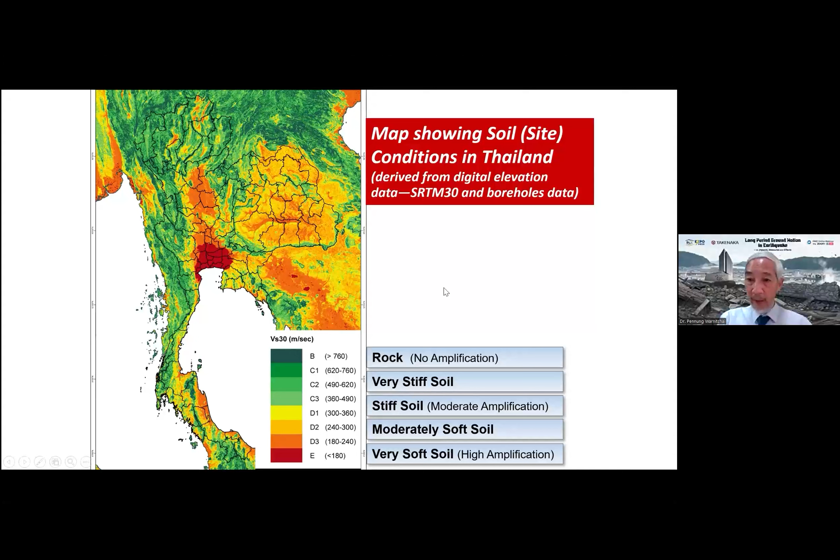Okay, and inside the country, there is one area that has an extremely soft soil condition. That is Bangkok and the surrounding provinces. You can see in this map the red zone. Okay, so it is not just the area with the soft soil. In fact, this red zone is a big soil basin, a very deep soil basin. And the top layer of the soil in this basin is soft soil. But the layers below that are not that soft, but it's a kind of very thick soil basin.

The depth from the surface down to the bedrock is about 800 meters in the Bangkok area. The basin is very large. The boundary of the basin is Chachoengsao, as you can see here, Nakhon Nayok, Ayutthaya, Samut Songkhram. The basin actually covers around 14 provinces in this area.

We know that the soil basin, especially deep soil basin, can amplify the ground motion. And not only does it amplify the ground motion, it amplifies only low frequency ground motion. Sometimes we call this low frequency ground motion long period ground motion, because low frequency means it takes a longer time to complete one cycle of motion, of oscillation. So low frequency means long period.

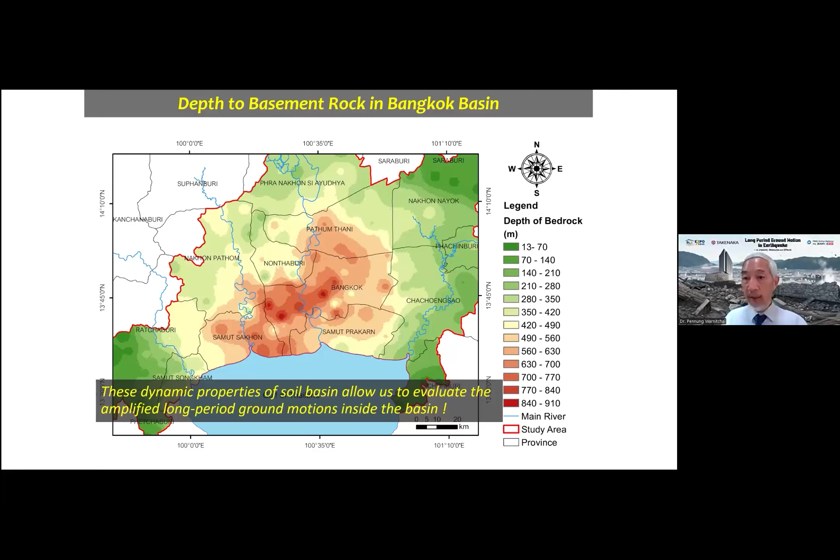Now let me explain how long period ground motion gives an impact to long period structures. Let me show you 3 examples.

The first one is a kind of tall 50-story building. It has its own natural period, or the period that it likes to move in. It's about 5 seconds.

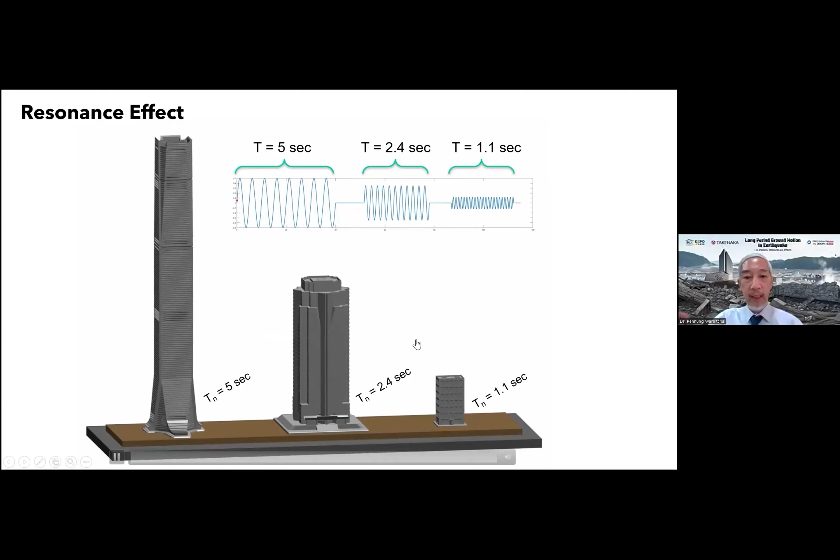Now, we knew about this problem a long time back. This slide was made many years before the earthquake that just recently happened. We came to a conclusion many years before that Bangkok and surrounding provinces are at risk of disaster from distant large earthquakes because we have a deep soil basin that can amplify long period ground motion.

And we have a large number of long period high-rise building structures on top of this basin that will be strongly shaken by the resonant effect with this long period ground motion.

We actually predicted that there are 3 possible dangerous earthquake scenarios that can produce strong impact on tall buildings. The first one is a magnitude 7 to 7.5 in Kanchanaburi, around 200 kilometers from Bangkok. This has never happened yet, but it may happen in the future.

The second possible scenario is an earthquake of magnitude 8 along the Sagaing Fault in Myanmar. The event 3 months ago was close to this one. The last one is an earthquake of magnitude around 8.5 to 9 along the Arakan subduction zone, which is on the west side of Myanmar.

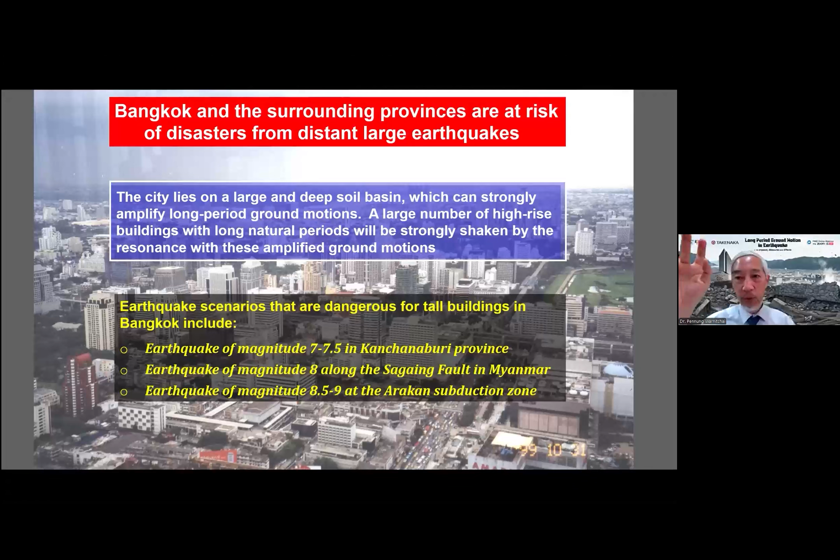This one has not happened yet, but it happened around 260 years ago, so we do not know when it will happen again. But all these 3 possible scenarios, we think the chance to have them during our lifetime is very low, less than 10%. The chance not to have them during our lifetime is more than 90%. But it seems that... I may be wrong, okay, it came too soon. But let's see.

Since we recognized this problem a long time back, we introduced a law, a ministerial regulation, requiring tall buildings in Bangkok to be designed for earthquake resistance. We require all tall buildings in Bangkok, Nonthaburi, Pathum Thani, Samut Prakan, and Samut Sakhon to be designed against the effect of long period ground motion since 2007.

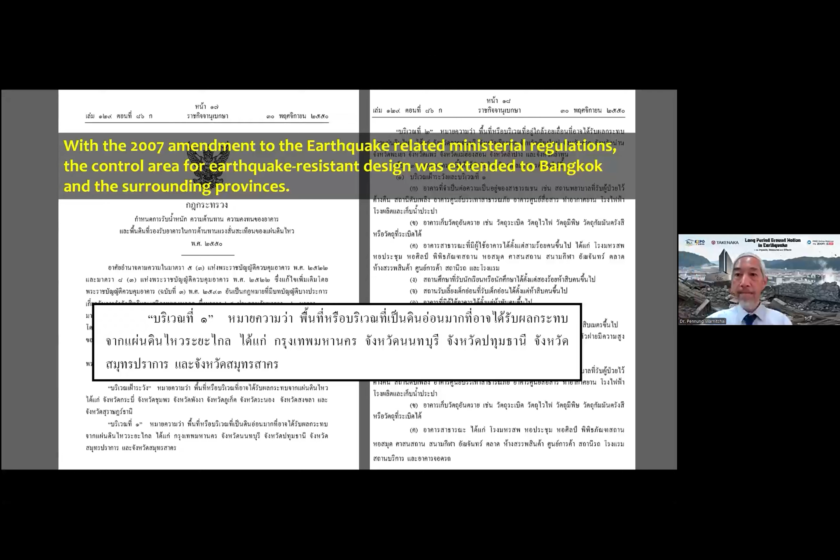Not only having a regulation, but we also have a seismic resistant design standard issued by the Department of Public Works and Town and Country Planning, Ministry of Interior. The first version of this standard came out in 2009, and then we revised it again around 2019.

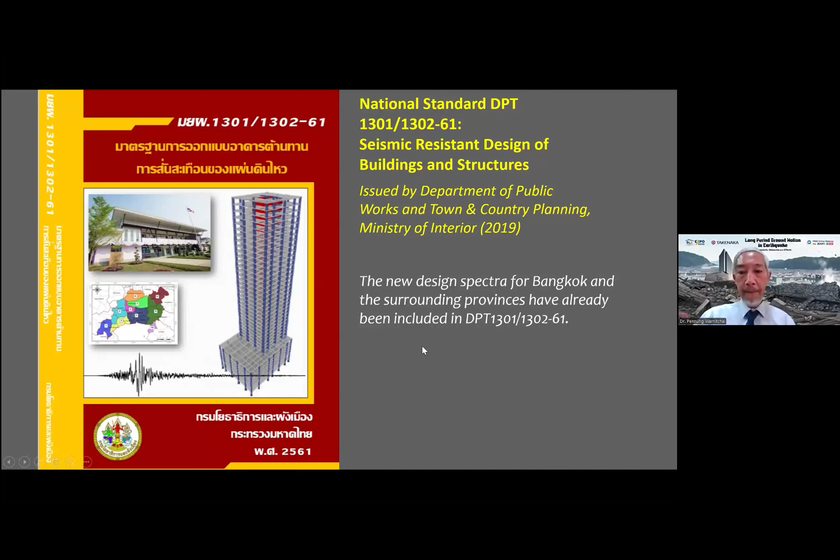In this new standard, we divide the Bangkok basin into 10 different zones, and Bangkok itself is zone 5. For these 10 different zones, we have 10 different curves we call design spectrum.

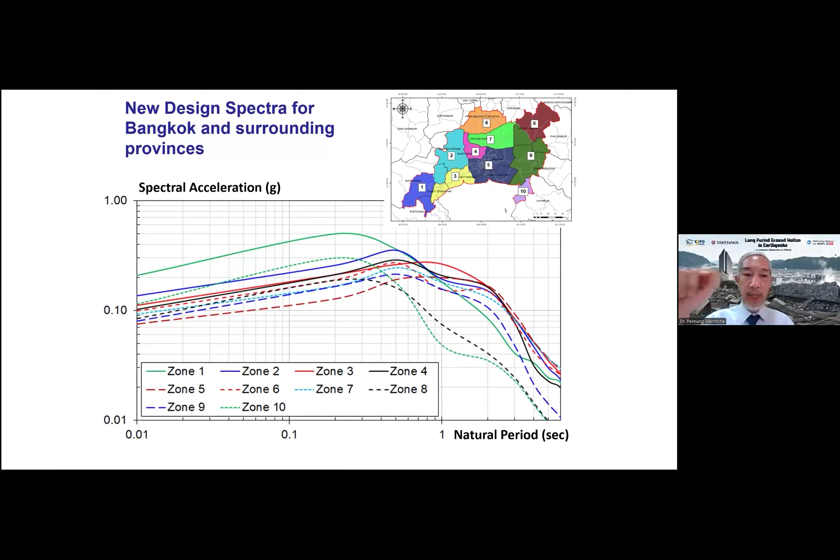This design spectrum's vertical axis shows the level of earthquake-induced force in the building. In technical terms, it's called spectral acceleration, but basically it's an index telling you how strong the earthquake-induced force is in the building. The horizontal axis shows the natural period of the building, which is the vibration period of the structure. So the earthquake-induced force depends on the natural period, and it also depends on the location.

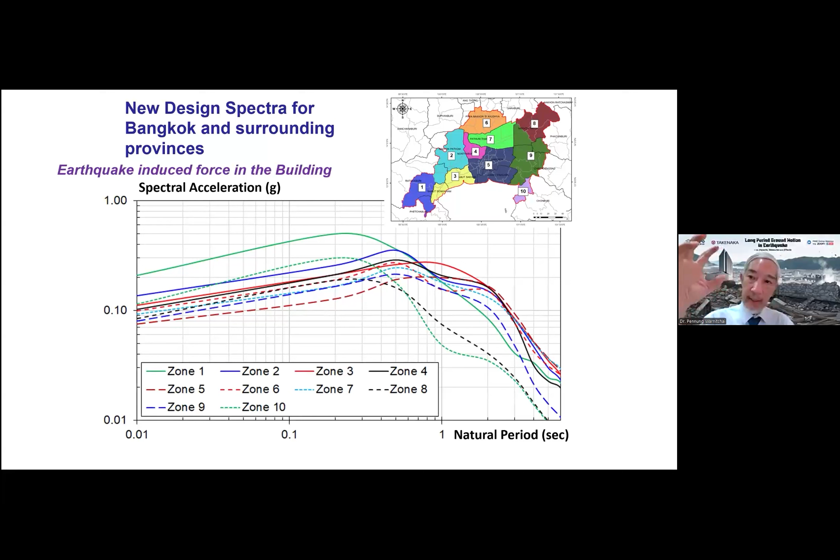We have 10 different graphs that allow engineers to estimate the impact of earthquake in this area, so engineers can design the structure to withstand this impact.

So on the 28th of March, an earthquake happened. This was the strongest that we have ever experienced. I think we never had this experience before - this is the strongest ever experienced since we started constructing tall buildings.

The first thing we did after we got this record was to calculate the impact to the building and compare it with our design spectrum. Let me show you this. This slide shows the design spectrum, the level of earthquake that we consider in building design.

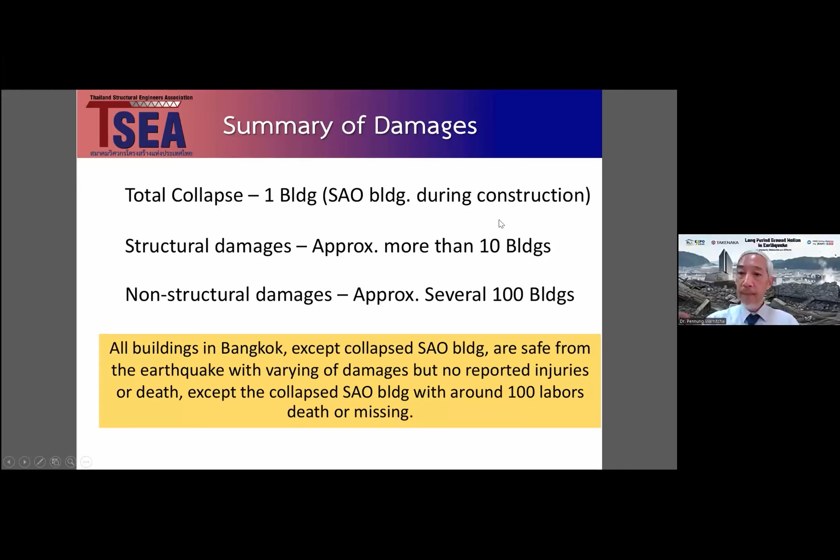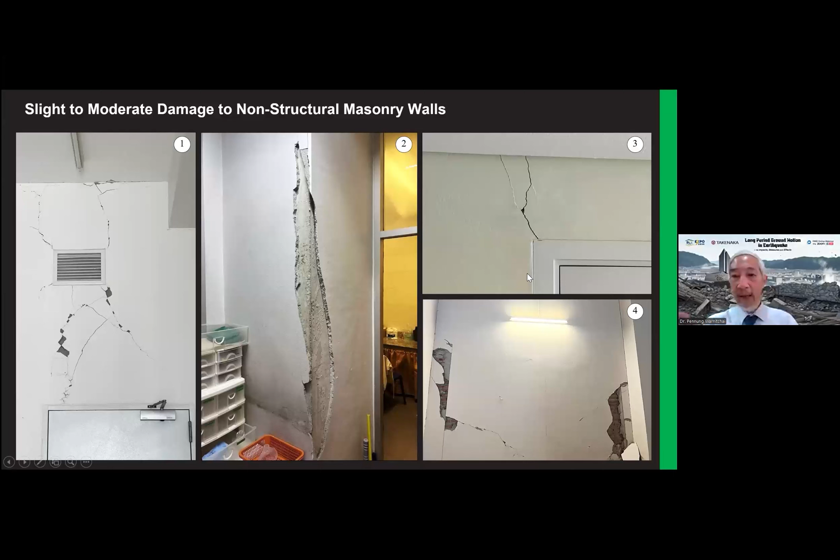This shows examples of damage, slight to moderate damage to non-structural components. You can see the cracking on partition walls, plaster crack. This is a small crack, but it can, and this is a larger one. I mean, more severe damage that you can see through the wall. Okay, maybe to repair this, you need to knock down the wall and replace it with a new one.

These are the damage to non-structural components. Although it does not affect the safety of the building, it actually affects the serviceability of the structure.

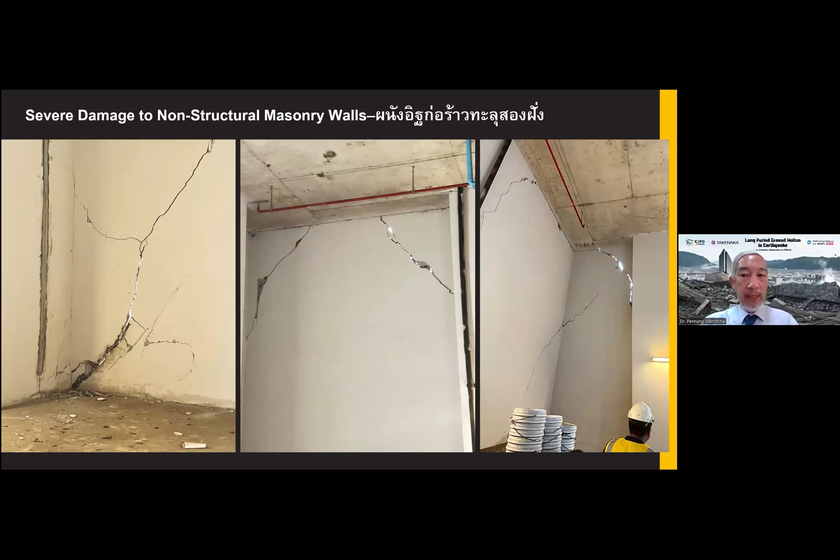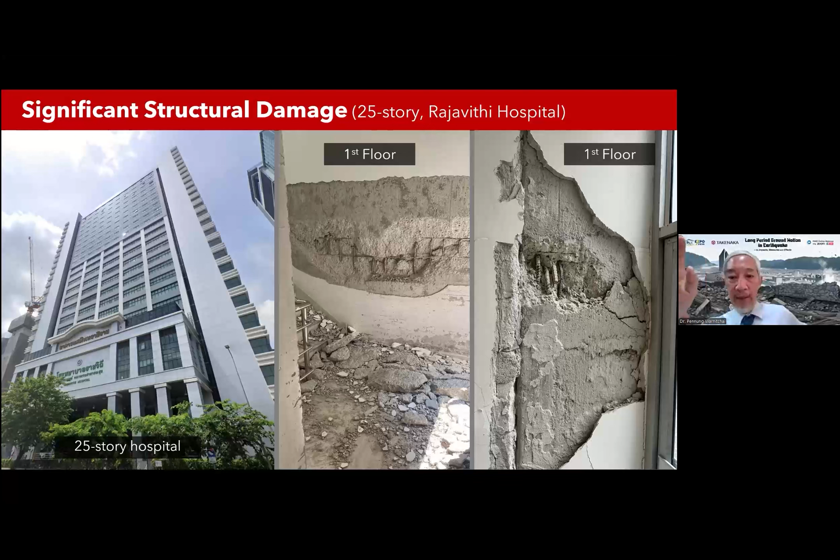So whenever we find damage to the main structure, we stop the use of the building, and we will allow the building to be used again after it has been properly repaired. So this is an example of the damage to Rajavithi Hospital building.

Some of them are serious, some of them are not serious. So in order to understand or get a better picture, we actually use the recorded ground motion that we have in 5 seismic stations in Bangkok to compute one index we call roof drift ratio. Roof drift ratio is defined as the maximum lateral top displacement, we call delta, divided by the height of the building. It's delta divided by h, roof drift ratio. We believe that if the roof drift ratio is high, then the damage in the structure is high. So it's a kind of index to show the impact of earthquake in a simple manner.

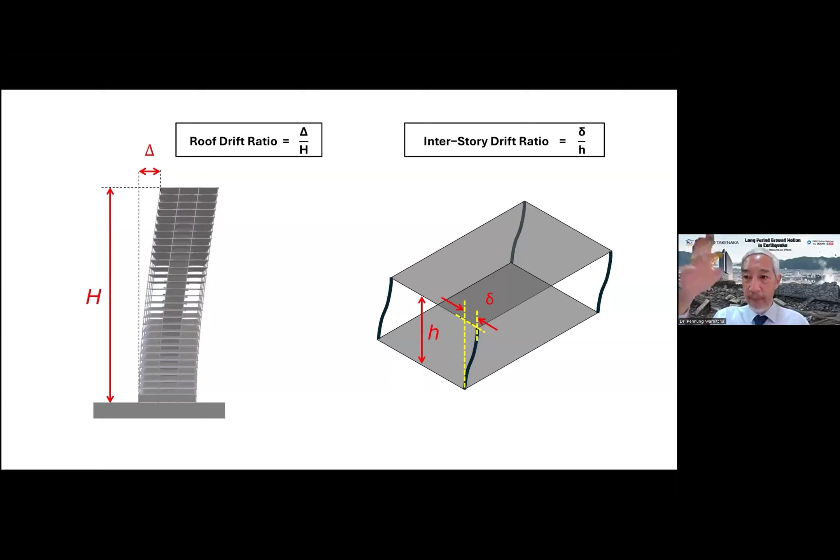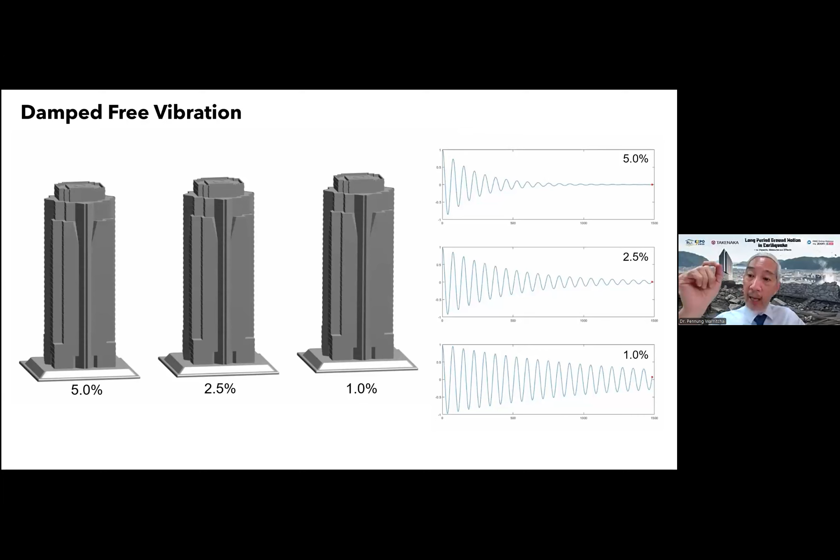In the past, we used to believe our buildings had a rather high damping ratio, about 5%. But based on the study of codes and standards for designing tall buildings in many countries, it's recommended to consider lower damping. So we changed our standard to set the damping to 2.5%. But actually, after this event, we have more data, more evidence, and all the evidence seems to indicate that the damping of our tall buildings is lower than 2.5%. They are actually closer to 1%.

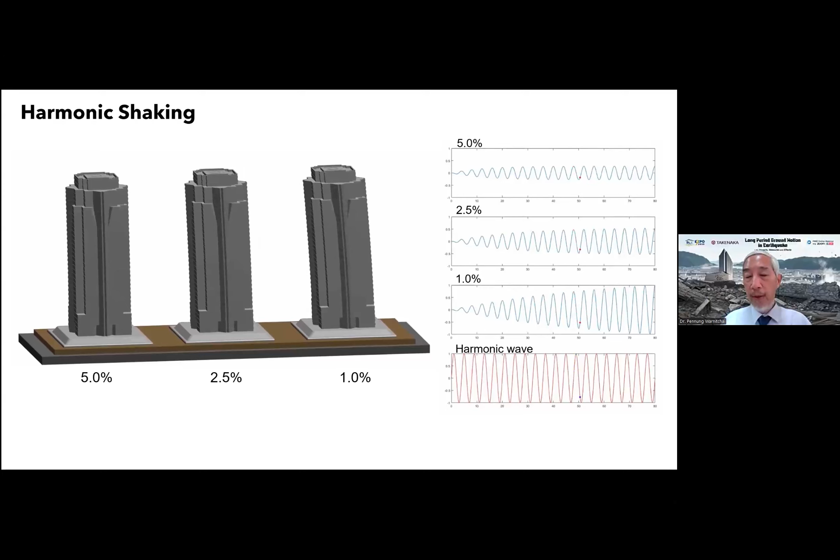So damping ratio is another factor that influences the response of the building. Not only the natural period, but also the damping ratio.

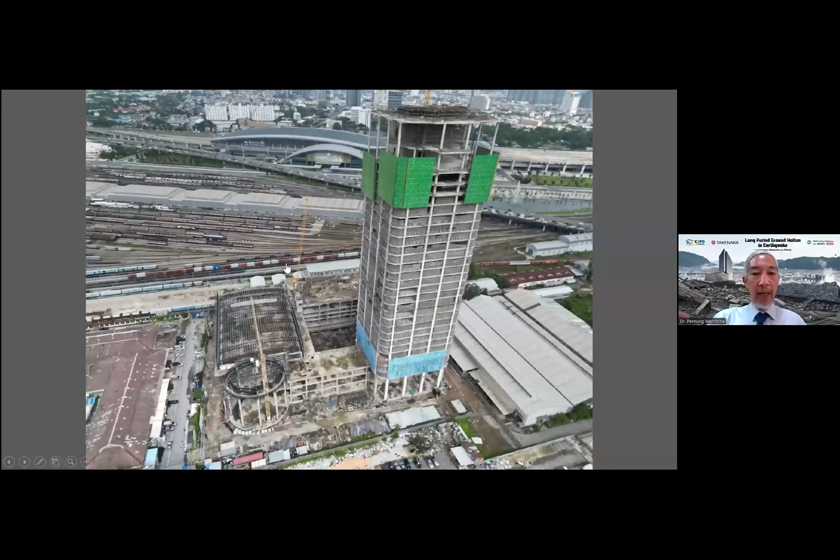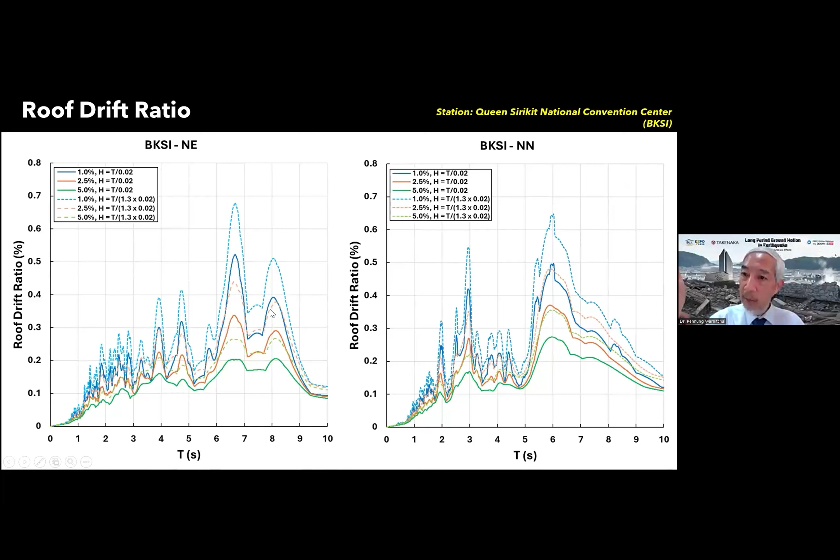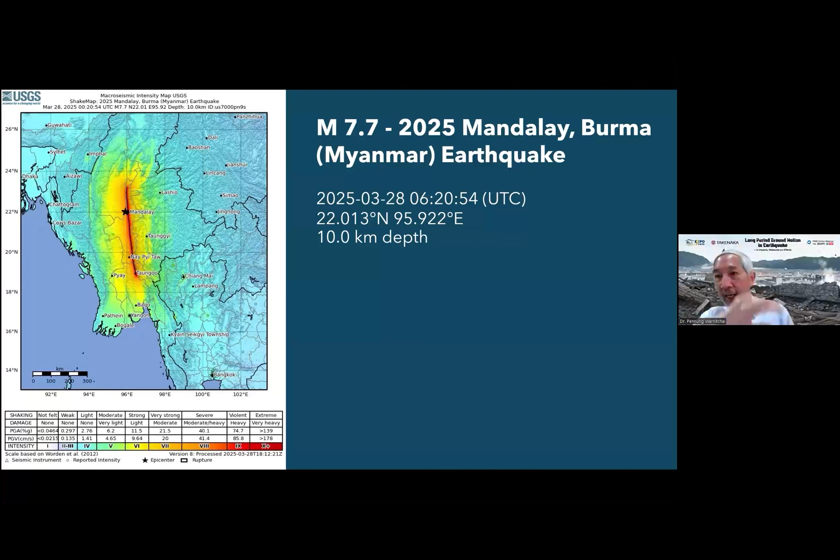Now let me come to the final point. So what will be the future earthquake? You have seen this case, the one from 3 months ago. It was a large earthquake created by a rupture from Mandalay to Naypyidaw. What we are worried about is that it may continue to rupture further to the south in the future. Because after an earthquake rupture, it releases strain energy, and it may need some time to accumulate strain again in this portion, Mandalay to Naypyidaw. But the portion below may have accumulated some strain energy, and now it's waiting—when the level of strain energy reaches some threshold, it may rupture again. So in order to understand this, we have to see the history of earthquake rupture along this fault.

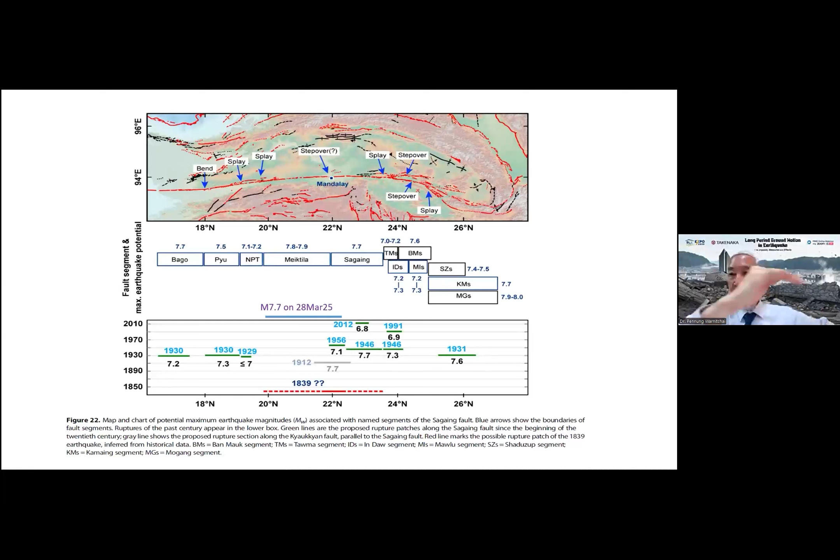Let me show you this picture. This shows the Sagaing fault and its rupture history. The recent one is magnitude 7.7, from Mandalay to Naypyidaw. The other lines show ruptures in the past. You can see the rupture here in Mandalay; the one before March 28 was in 1912, around 113 years ago—a very long time. The portion at Naypyidaw had its past rupture around 180 years ago. But from Naypyidaw down to Bago, down to Yangon, the past rupture was around 95 years ago.

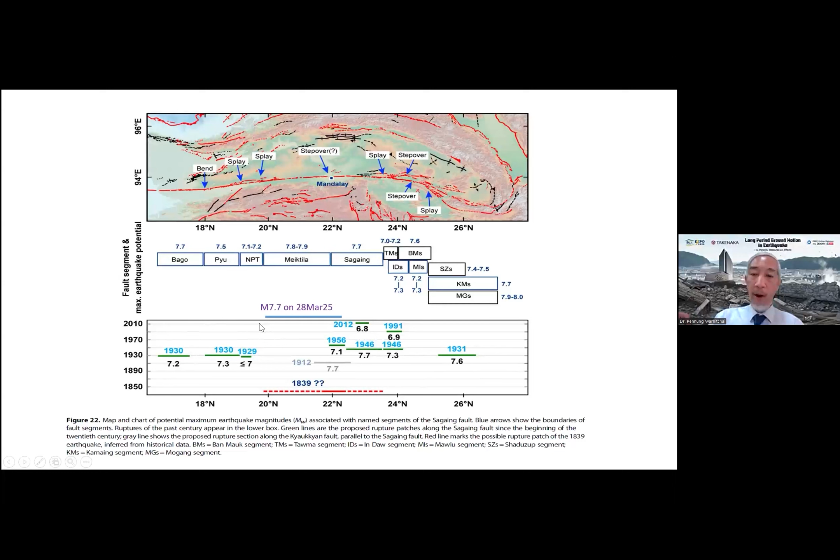So that portion has not ruptured for quite a long time, but not long enough. It may take more time to accumulate more strain, more energy, to rupture again in the future. If it ruptures only a small section, it may not produce a severe earthquake—maybe 7.1, 7.2, 7.3—and the impact to Bangkok may not be so strong. But if it produces 7.7 again or larger, it may produce an even stronger earthquake impact on Bangkok, because it's the same size or larger, at a closer distance to Bangkok. So this shows you the possibility of a future earthquake, but I cannot tell you when it will happen again.

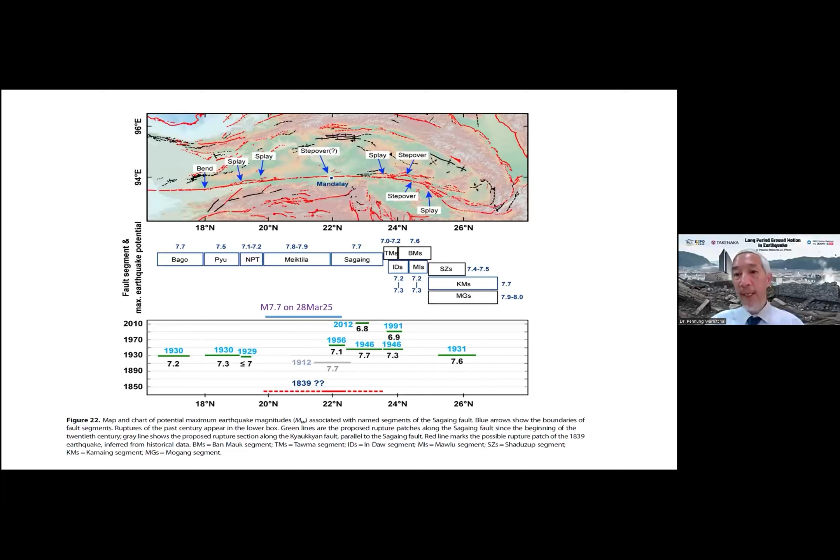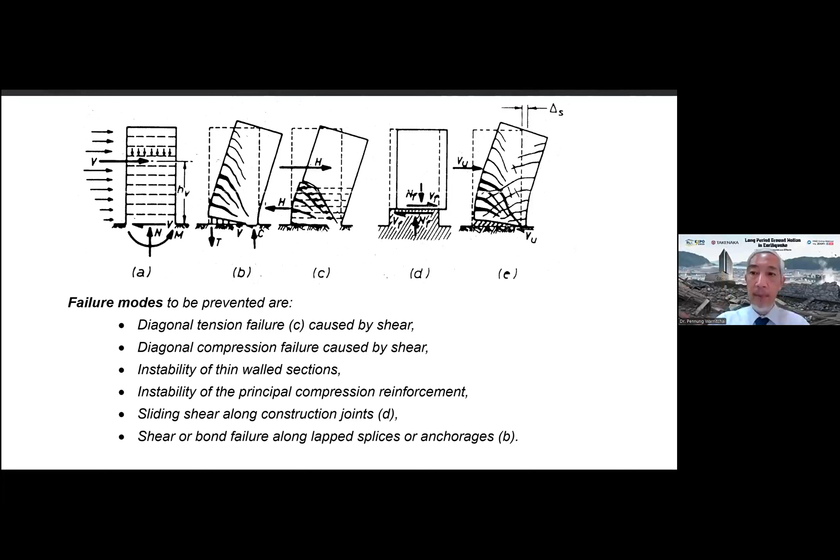The approach is we need to suppress or prevent brittle failure modes in the shear wall. In this event, we have seen some buildings have a lap splice failure. Some buildings have rebar instability. Some buildings may fail by shear. All these are brittle failure modes that need to be prevented in the core wall. If we prevent all these failure mechanisms, then the wall will be more ductile.

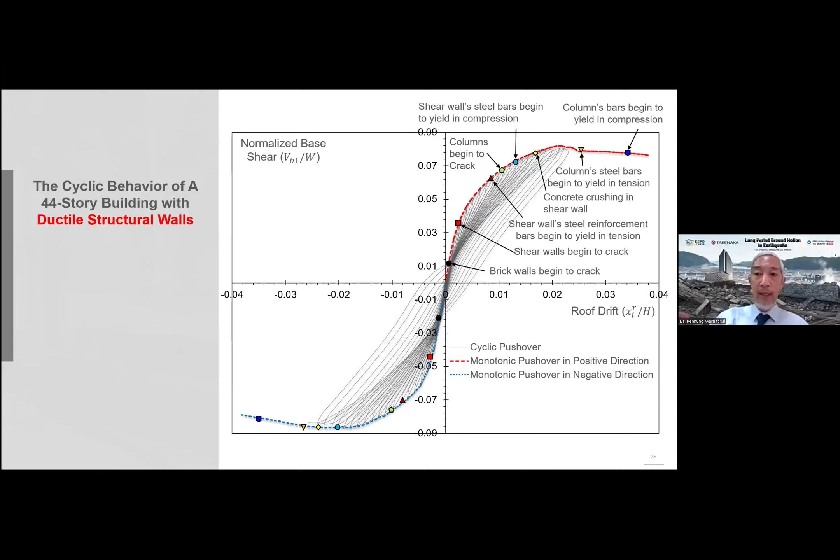Our structure will be safe, but we may not be able to prevent damage to non-structural components, because, as I showed you earlier, the yellow zone and the orange zone represent the level at which, if the structure deforms up to that level, it will have damage to non-structural components. So how can we prevent damage to non-structural components?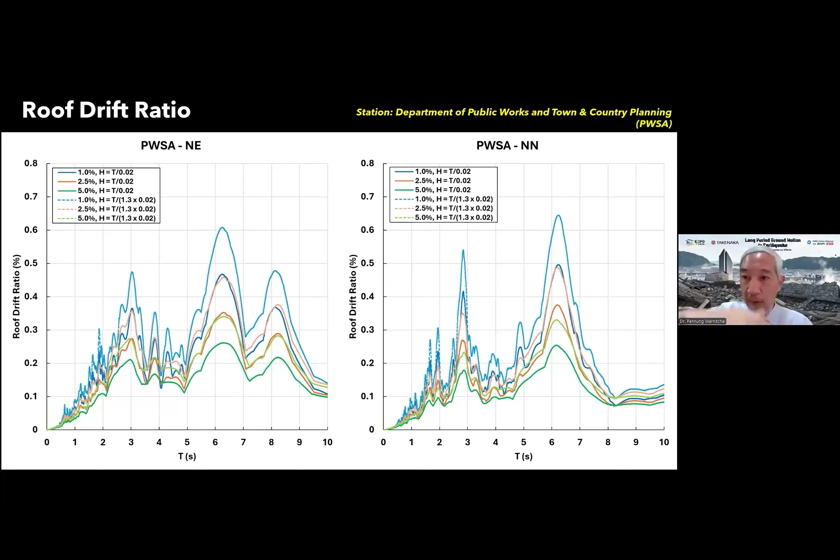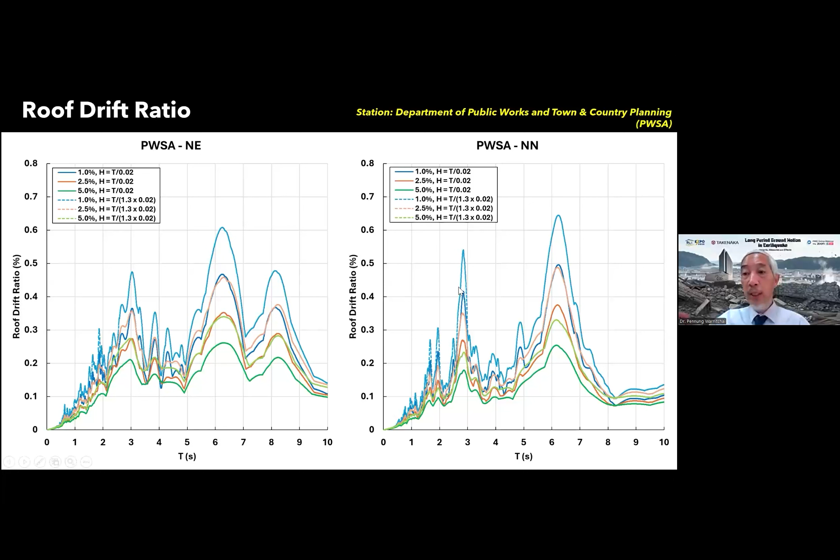If you want to do that, as shown in this picture, you need extra damping. Most buildings are likely to have damping as low as 1%, or somewhere between 1 to 2.5%. But if you increase the level of damping, you can bring the roof drift ratio down. If you want to increase the level of damping, you want to be sure the structure has a high damping level. One way to do that is to install a vibration damper into the building.

This is an example of how we can increase the level of damping. One way is to put in a viscous damper, but actually there are many ways—there are oil dampers, there are metallic dampers. We can install this kind of device into tall buildings, and it will increase the building's ability to absorb vibration energy, increasing the level of damping in the building.

This approach has not been implemented yet in Bangkok, but I think after this event, we may have to seriously consider this option for the future. It can also be used to improve the performance of existing buildings. If you are not sure about an existing building's performance, or want to reduce its risk for future earthquakes, you can think about putting this kind of damper into the system.

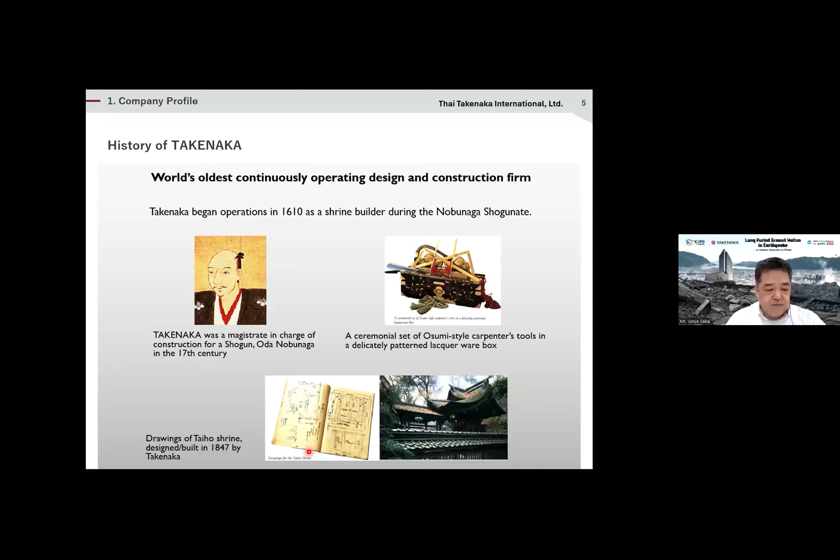So I'd like to begin with the company profile of Takenaka. In 1610, the founder of Takenaka established a business in Nagoya to conduct temple and shrine construction. This is the first style of design and build. Here, you can see the design sketch, and they built based on the design. This was the 17th century, and this design-build single responsibility style has lasted until now in the 21st century.

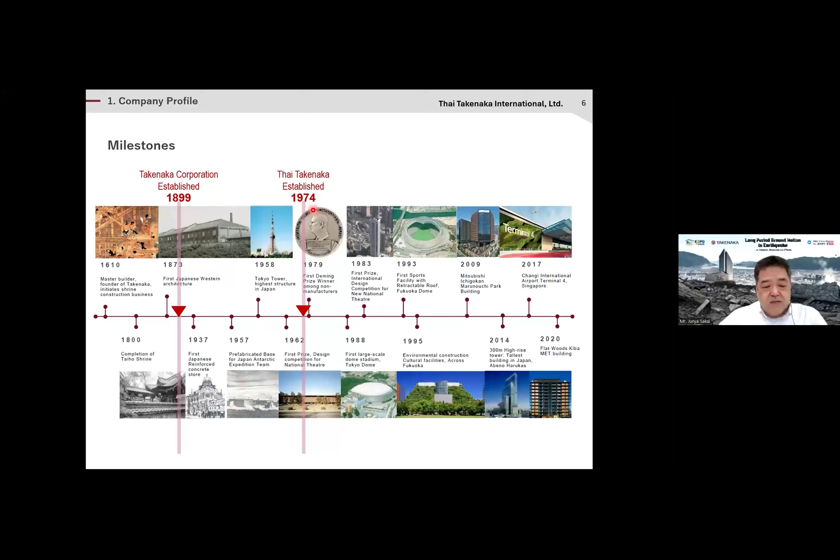In 1899, the corporation was founded in Kobe, and Takenaka took on many challenges for cutting-edge technologies. And in 1974, Thai Takenaka was established, and last year we celebrated our 50th anniversary. Takenaka is one of the big 5 contractors in Japan. It reported approximately 1.6 trillion yen, meaning 11 billion US dollars in revenues in the 2024 fiscal year, and 30.5 thousand employees in our group. The global business portion is around 1/8 of total sales and employees.

A somewhat unique aspect of Takenaka is that it is the only privately held general contractor among Japan's Big 5, and we focus on architecture, with less than 10% civil works, and are a design-build specialist for over 70% of projects. And we have trusted partners, so the majority of projects are single source awards.

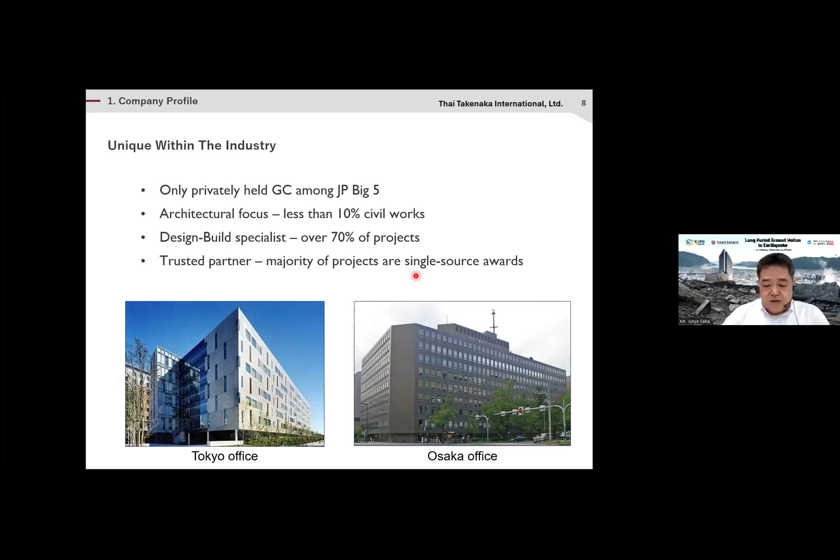Takenaka has 30 offices overseas in Asia, Europe, and the United States. In Asia, we have 12 offices, including Singapore, China, Indonesia, Malaysia, Thailand, Vietnam, India, and Myanmar.

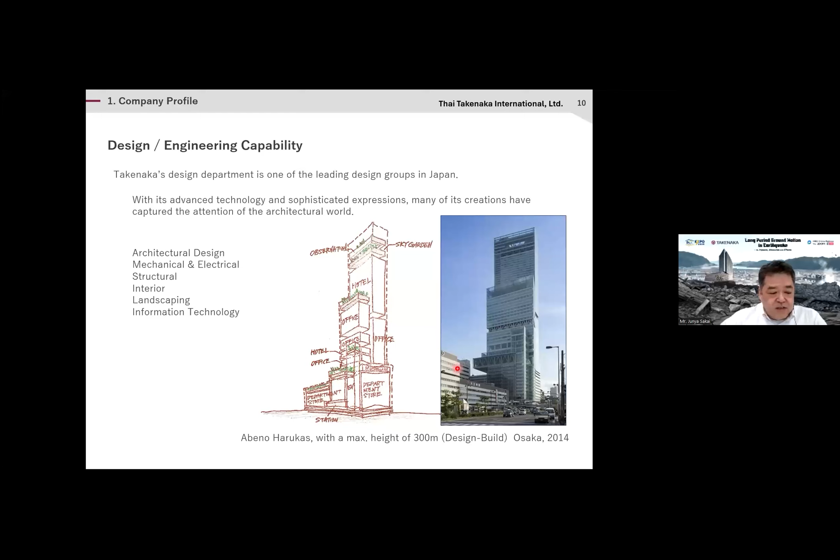As I said, Takenaka is a design-build company, and when we look into design works, the Takenaka Design Department is recognized as a leading design group in Japan. The example shown here is the tallest building in Osaka. With a height similar to Mahanakhon Tower, it has an attractive facade as a multi-functional complex building. And to realize the design and its requirements, Takenaka's construction capability is enough to achieve the quality, with sufficient experience.

This is an example, the Sapporo Dome. This field of natural lawn goes into the dome at the time of rain and snow. And on the right side, there is a high-rise condominium building connected with 3 layers of sky garden. It required a high level of construction accuracy at each connecting level.

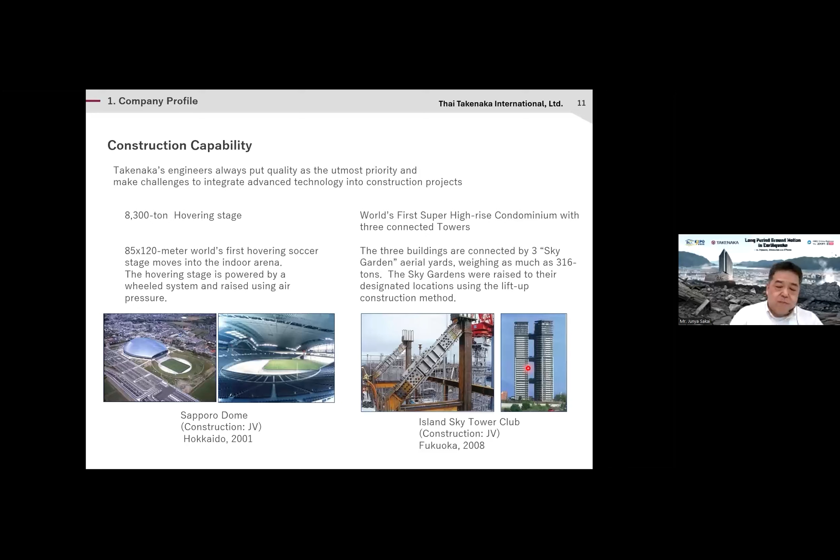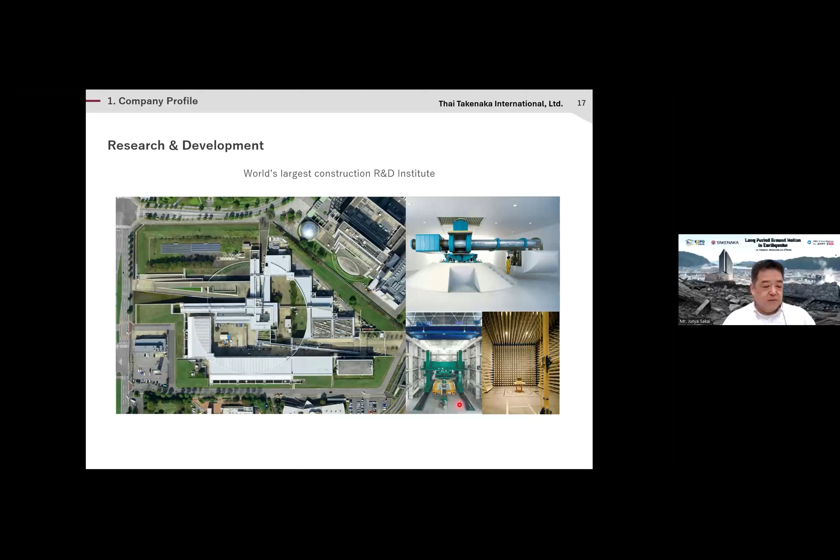Takenaka also has a research and development institute in Japan, which is one of the largest construction R&D institutes. We have a geocentrifuge, wind tunnels, a loading testing machine, fire furnaces, and so on. That is the project experience shown in the photos I passed through.

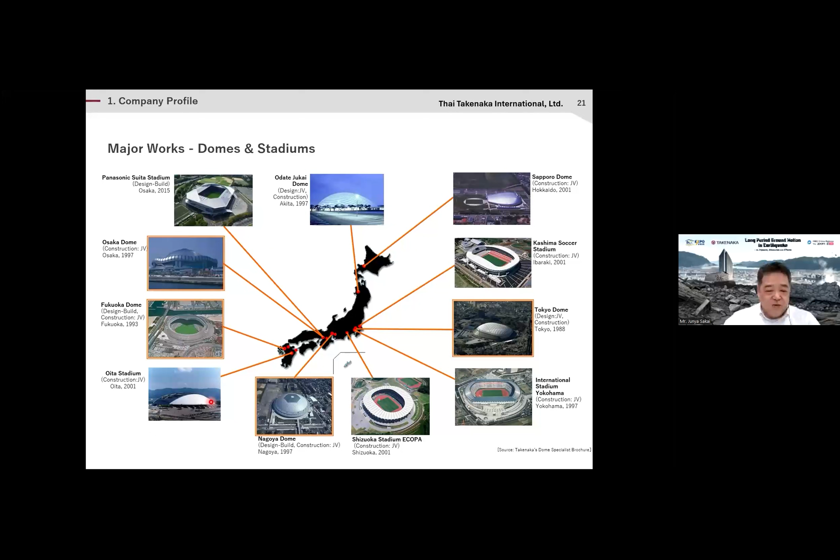To talk about Takenaka International, we are also the same design and build company, providing the same service as Takenaka in Japan, as one-stop solutions. There was 6.2 billion Thai baht of sales in 2023. Now more than 70% of our clients are non-Japanese companies. This is the end of the company introduction.

Let's move on to the long period ground motion matters. Firstly, as it freshly remains in mind, I'd like to talk about the earthquake in Myanmar. It was already explained by Dr. Pennung, but it happened at 13:20 Thailand time on the 28th of March, Friday. The epicenter is near Mandalay, Myanmar, at a depth of 10 kilometers from the ground. The magnitude of the earthquake is 7.7.

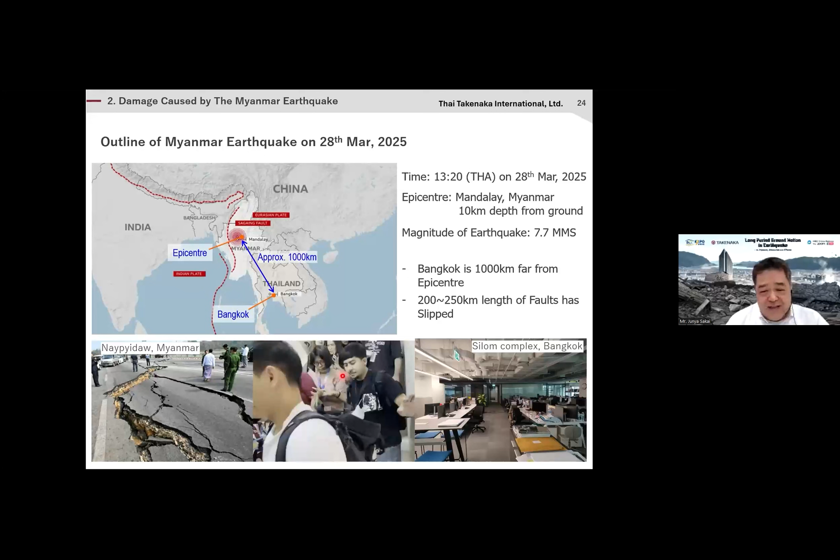This is showing what happened after the earthquake. We are evacuating to the ground floor. And this is showing that at the earthquake, people were not that panicked, comparatively calm behavior. Okay.

Why, in Bangkok, far from the epicenter, did high-rise buildings shake? It is related to long period ground motions. Long period ground motion mainly consists of surface waves that propagate near the surface with low attenuation. This is different from the characteristics of body waves, like P waves and S waves, which have distance attenuation. Long period ground motion is also amplified under the condition of a thick sedimentary layer above bedrock with shear velocity of more than 3 km per second.

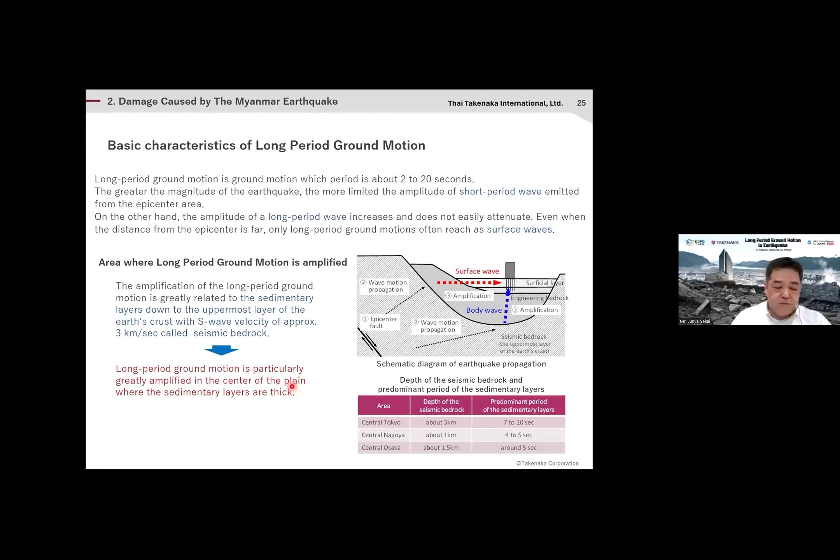So back to the Myanmar earthquake. The epicenter is shallow, and Bangkok has a thick subsoil layer above the bedrock. That makes long period ground motion propagate with low attenuation and be amplified by soft layers. That resulted in some high-rise buildings showing big floor drifts at the top, and as already shown in Dr. Pennung's slides, the big floor drift differences between two buildings damaged the joints of the connecting corridors. And water in rooftop pools caused sloshing and spilled off the buildings.

Let me skip and move on to the next topic. Let us look into the case in Japan and the actual measures in Tokyo. This is going to show videos of tsunamis. That is just information for those who don't know.

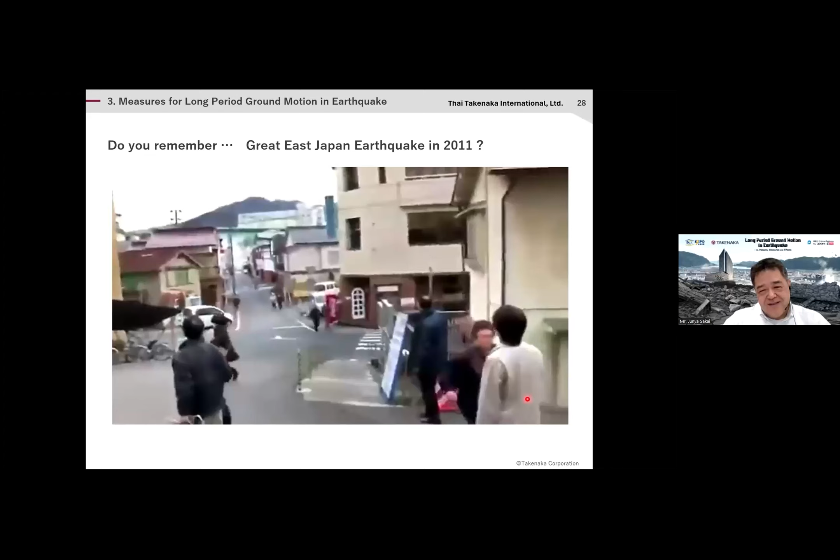Mr. Junya, you need to move the pointer away from the screen. Oh, I see. Let's try again. Or could you try pressing enter on the keyboard? Yes, there it is.

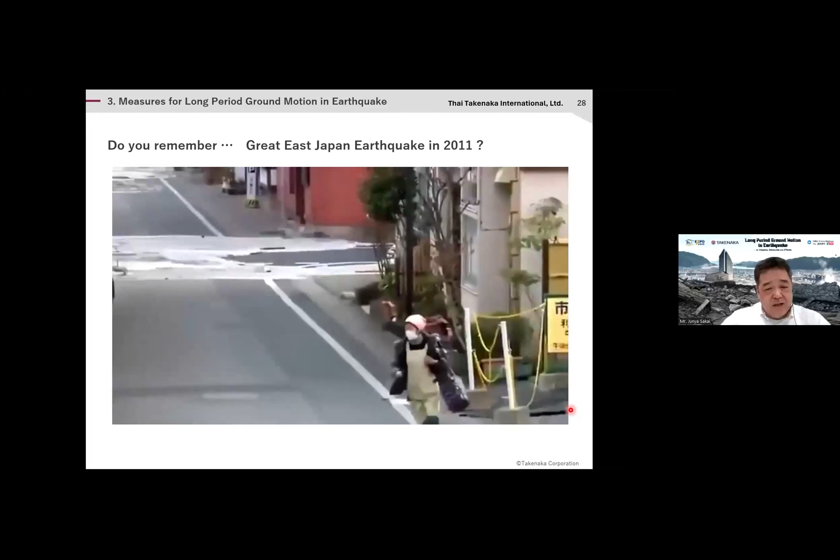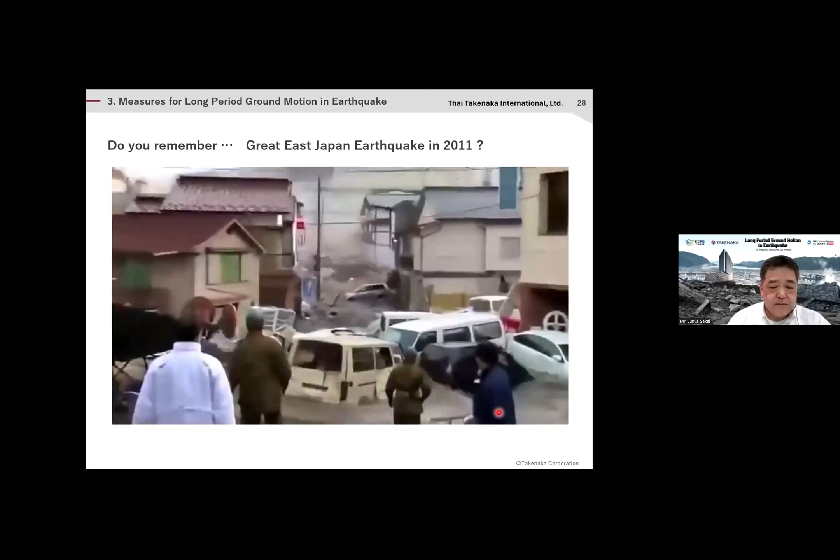This is rather not related to long period ground motion, but it shows the significance of the earthquake's tsunami effect. Okay. So this photo represents Rikuzentakata, a beautiful town facing the Pacific Ocean, famous for its green trees and white beaches, but it was swallowed up by the tsunami like this.

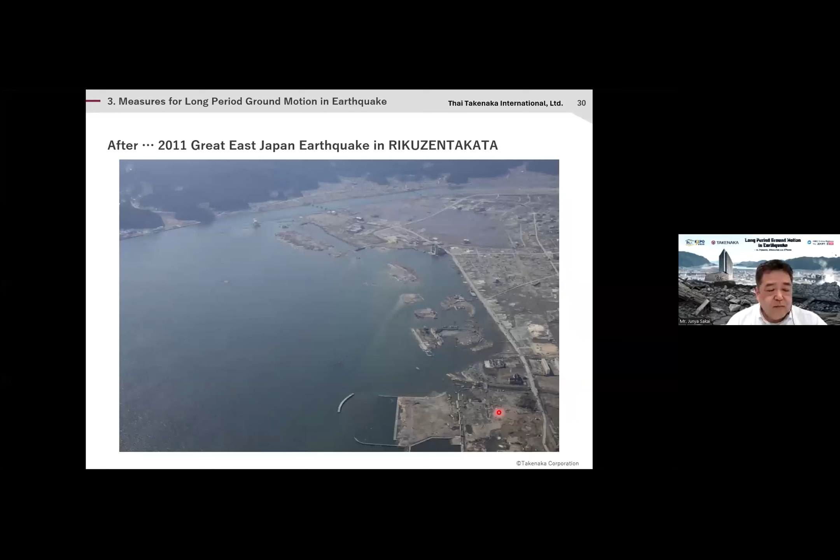At the same time, in Tokyo, 300 kilometers from the epicenter, this earthquake raised an issue on the seismic performance of skyscrapers, like in Shinjuku, now shown in the slides. This is also a movie. Enter. This movie is playing rather fast forward, but it shows the shaking of the skyscrapers at that time. This is the same phenomenon we've seen in Bangkok.

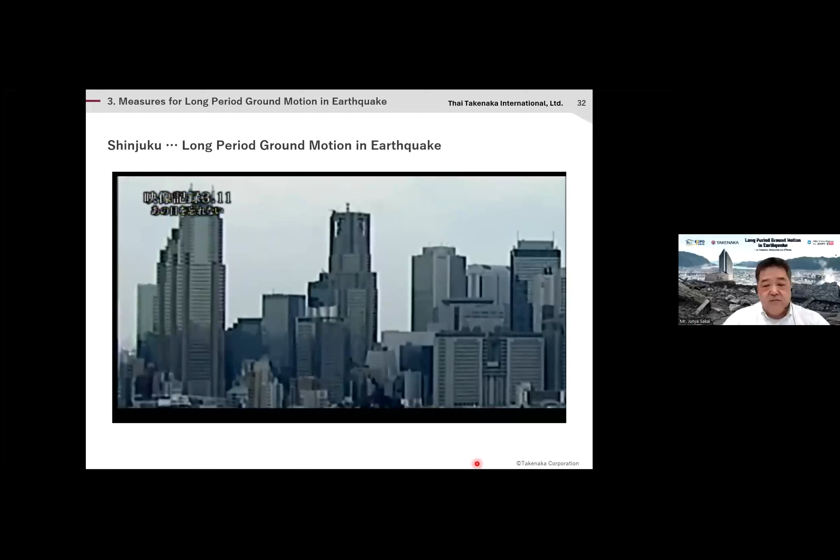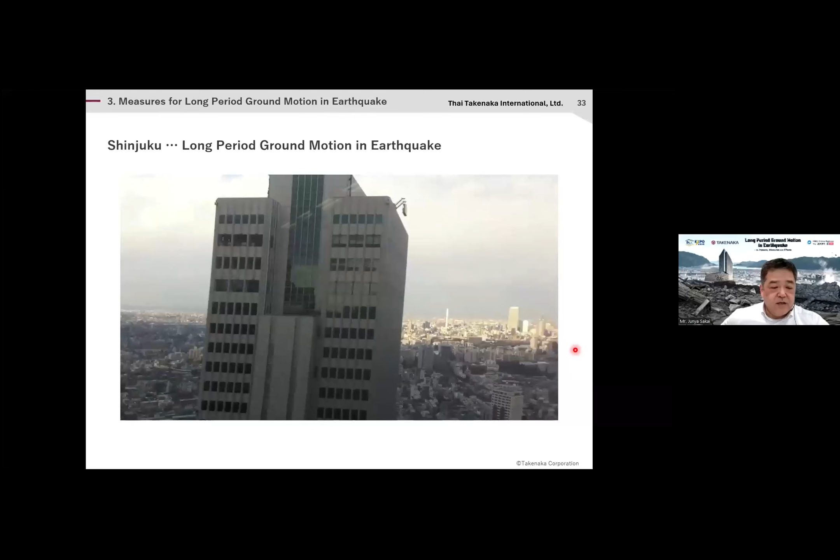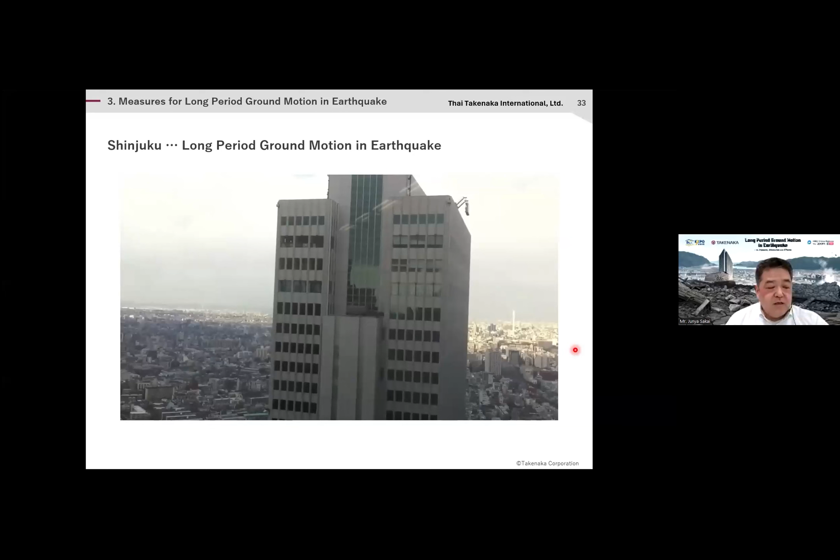This is also the video. This picture shows a slow shaking of some buildings in the Shinjuku area. We can see the slow movement that corresponded to the first mode of the buildings. The building on the left side is named Shinjuku Nomura Building, built in 1978. After this event, Takenaka retrofitted the building by installing a TMD, tuned mass damper, on its roof. I'll talk later about this in detail.

Even far from the epicenter, many skyscrapers continued shaking in the Great East Japan Earthquake 2011. This is the same as we've seen in Bangkok, and it is due to long period ground motions. Since then, strengthening of existing skyscrapers has become the key issue in Japan. A thorough review of analysis and observational records revealed that the damping rate of skyscrapers is only 1 to 2% without vibration control systems.

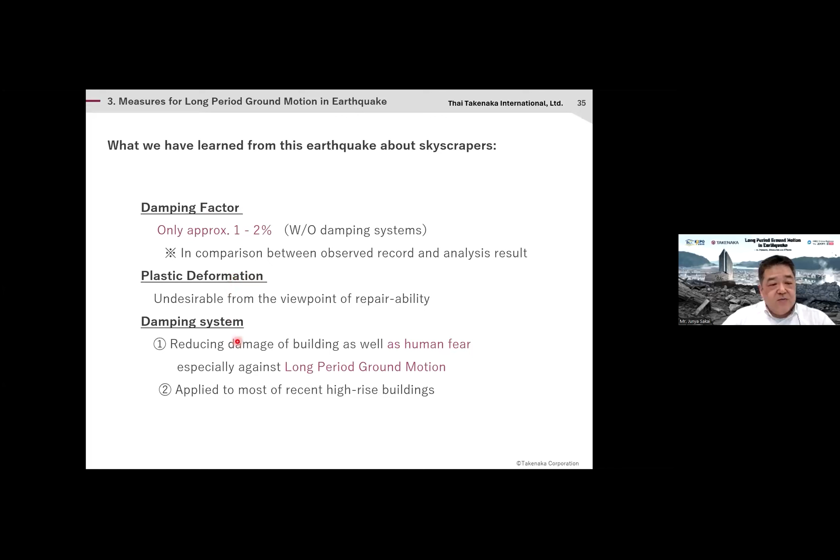A design concept of absorption using the plastic deformation of structural members is not desirable from the viewpoint of repairability, since it is difficult to repair. So damping systems are necessary, as also in the presentation of Dr. Pennung. These systems are necessary for reducing the damage of the building as well as human fear, especially for long period ground motions. From the viewpoint of resilience, damping systems are applied to most of the recent skyscrapers in Japan.

The main countermeasures against long period ground motion are to add dampers or to install a TMD on the rooftop. Damper installation has three disadvantages: dampers need to be installed on each floor, construction work is carried out in rental space that is already used, and the external appearance may be affected. On the other hand, TMD, tuned mass damper, installation can solve these three disadvantages. So we compared several types of TMD as countermeasures against long period ground motions.

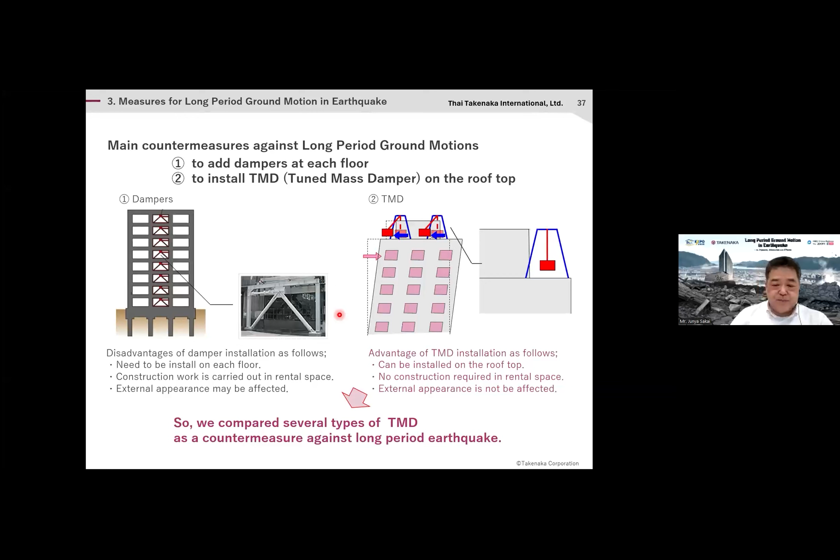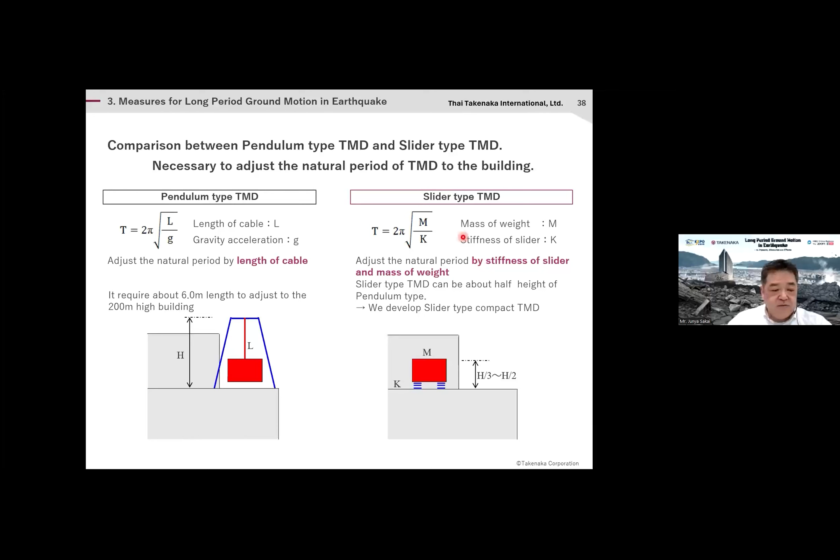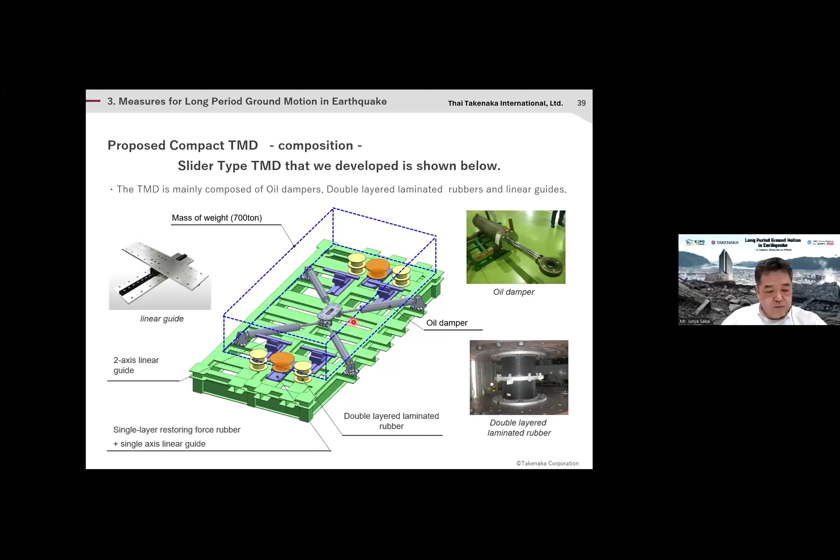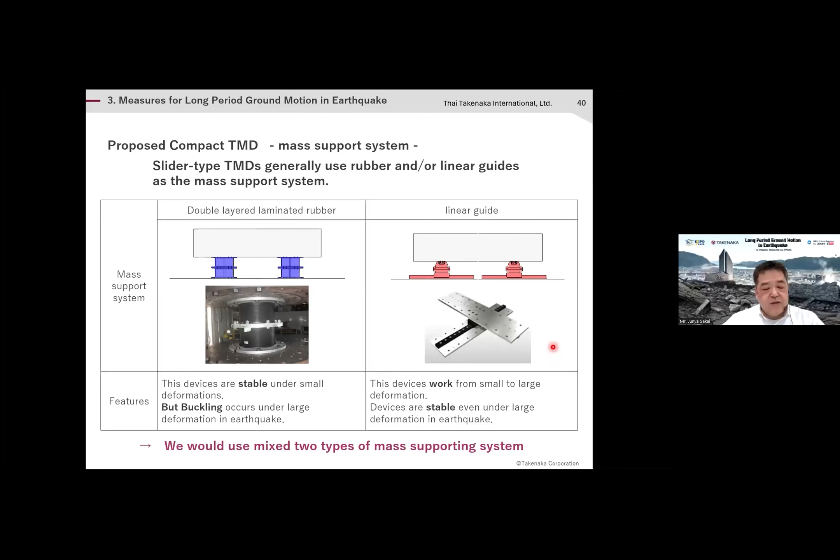Slider type TMDs generally use rubber bearings and/or linear guides as the mass support systems. The left side shows double-layered laminated rubber bearings. These devices are suitable under small deformations, like in wind load. But in large deformation, like under a big earthquake, they become like this, and buckling may occur. The right side picture shows a linear guide. These devices work from small to large deformations and are stable even under large earthquake deformation. We decided to use a mix of these two devices for the mass supporting system of the compact TMD.

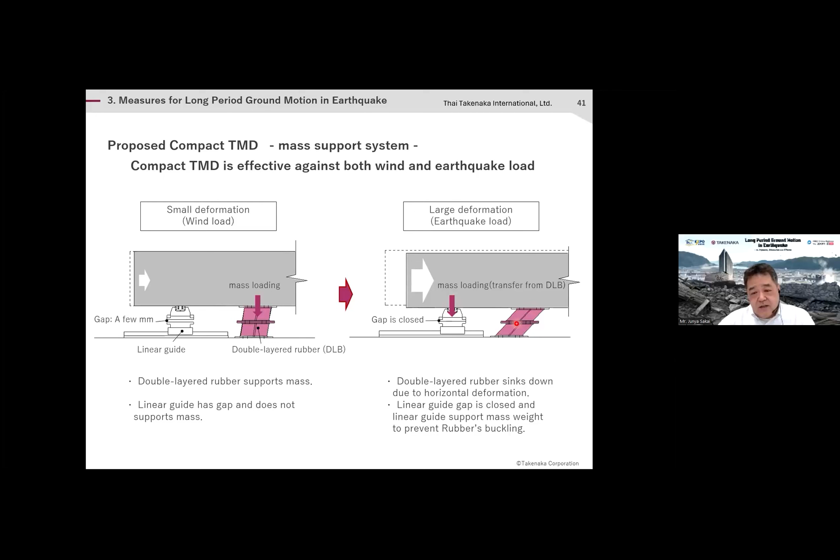The compact TMD is effective against both wind and earthquake load. In case of wind load, horizontal deformation will be small, so it moves like this, and the linear guide side has a few mm gap, so they will not touch each other. In case of earthquake load, horizontal deformation will be large like this, so the double rubber bearings sink a little from here, the gap is closed and the linear slider comes into operation. So under wind load the mass is supported only by the double-layered rubber bearings, but under earthquake load the linear slider also supports the mass. So the loading is shared by two devices.

The compact TMD was applied in the Shinjuku Nomura building, which was built in 1978 with a height of 203.25 meters. The proposed compact TMD was installed in the machine room on the roof, which has a limited height of 2.8 meters. It's a free space for the machine room. The client was also having trouble with the elevator's acceleration sensor reacting to strong wind, and every time it stopped and could not be operated.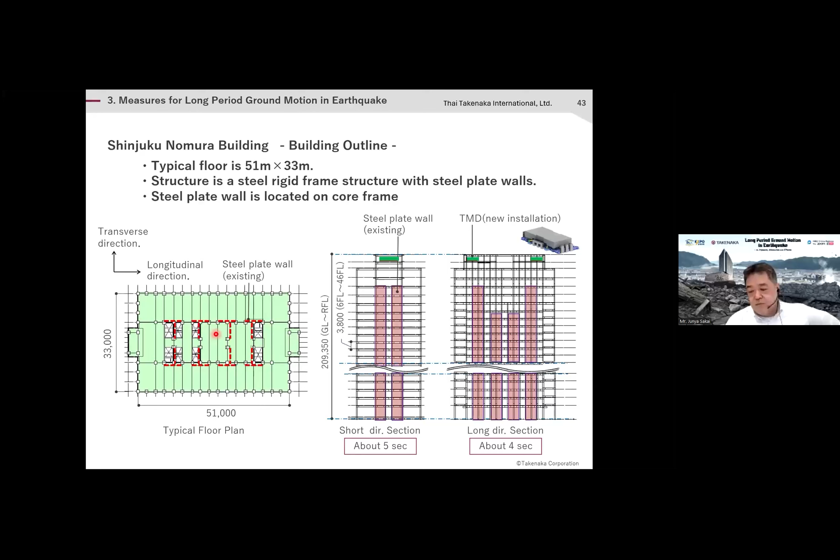Prior to actual retrofit work, performance confirmation tests were carried out on full-size models. We carried out two kinds of tests: a static test and a dynamic free vibration test. The weight of the TMD mass is 700 tons, and the size is 5.62 by 11.8 by height of 1.51 meters.

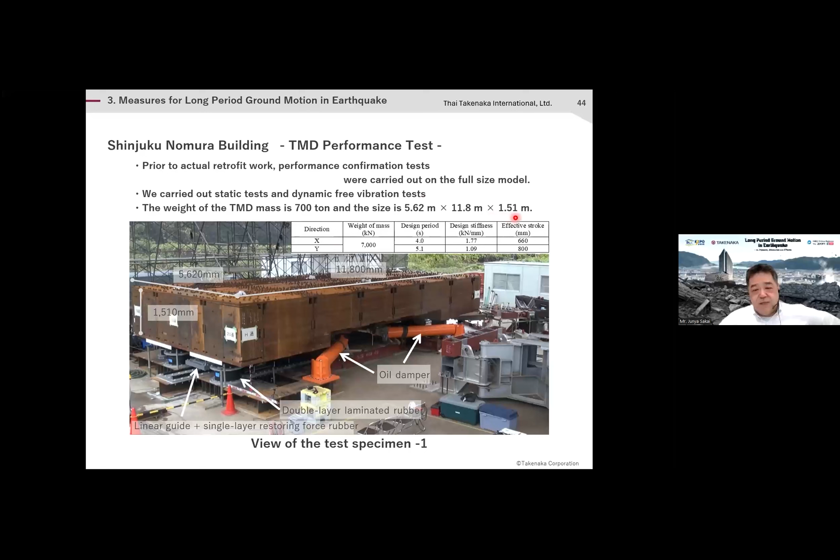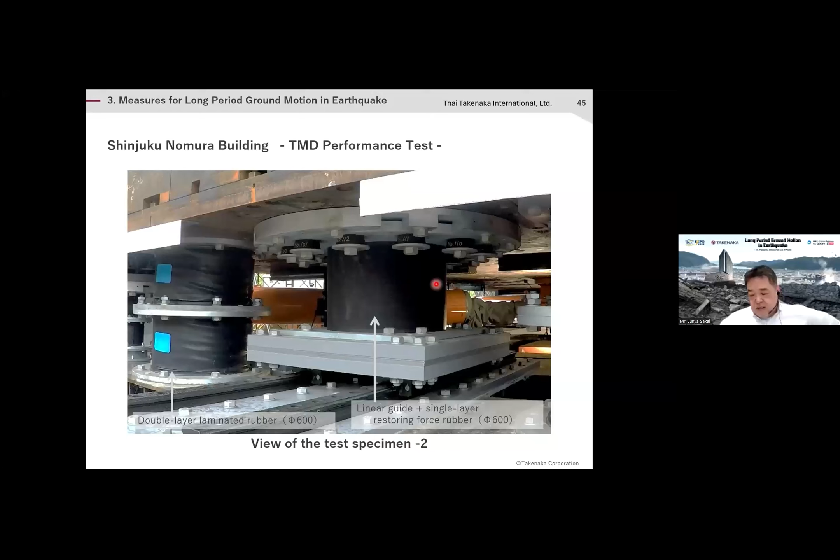As shown in the left side picture, double layer laminated rubber bearings. The right side is a picture of a single axis linear rail with a single layer rubber bearing above. Diameter of both rubber bearings is 600 mm.

This picture shows a linear guide slider and oil damper. There is a yellow oil damper that can be seen here.

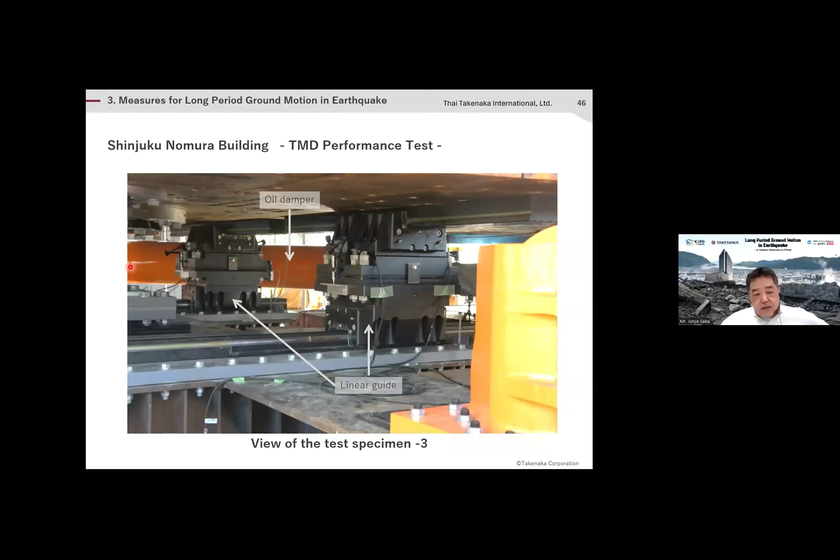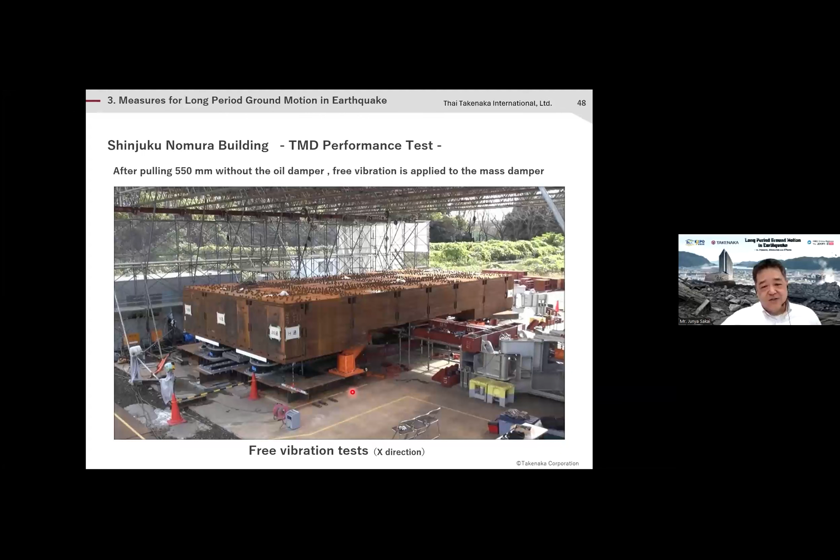This figure shows the free vibration waveform of the horizontal displacement over time, observed during the test in the x direction. At first it starts at 550, then is released showing this wave shape, and then it gets smaller.

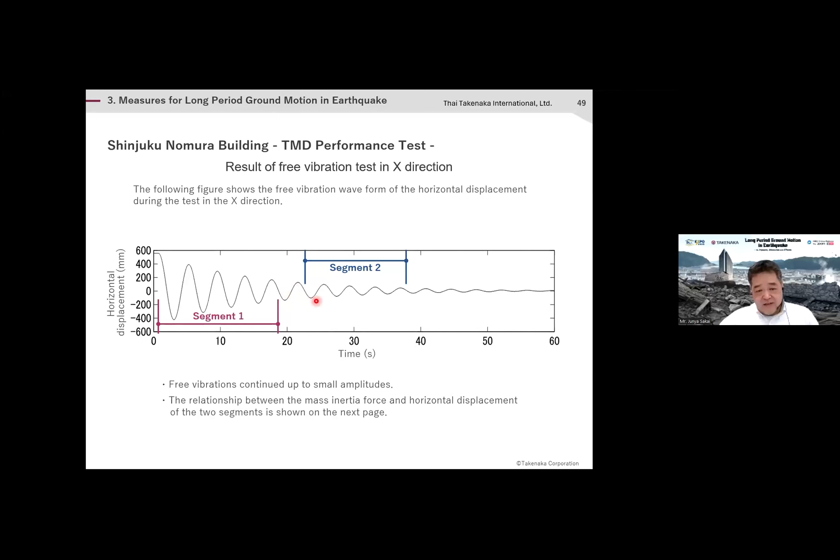This figure shows a relationship between the mass inertia force and horizontal displacement for two segments, a big segment and a small segment. The hysteresis of segment 1 shows a stable behavior even for amplitude that exceeds the allowable displacement of the double layer laminated rubber. The hysteresis in segment 2, with rather smaller amplitude, shows linear behavior up to small amplitude.

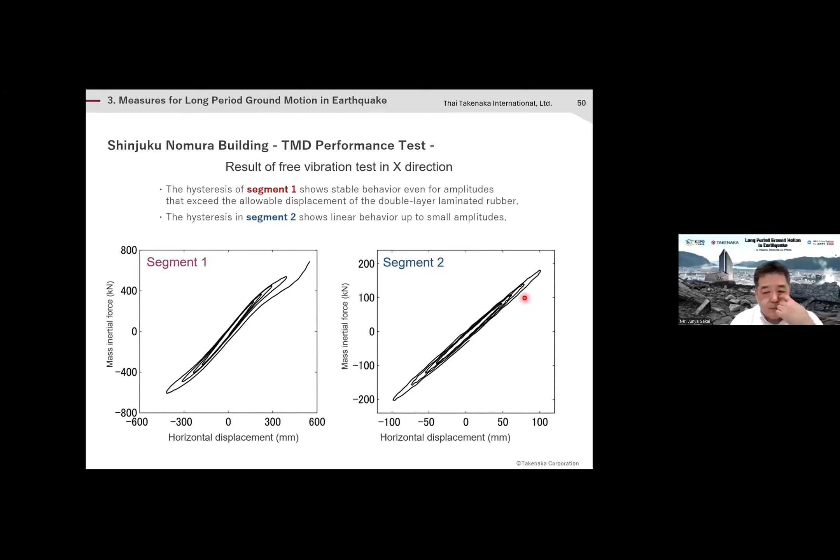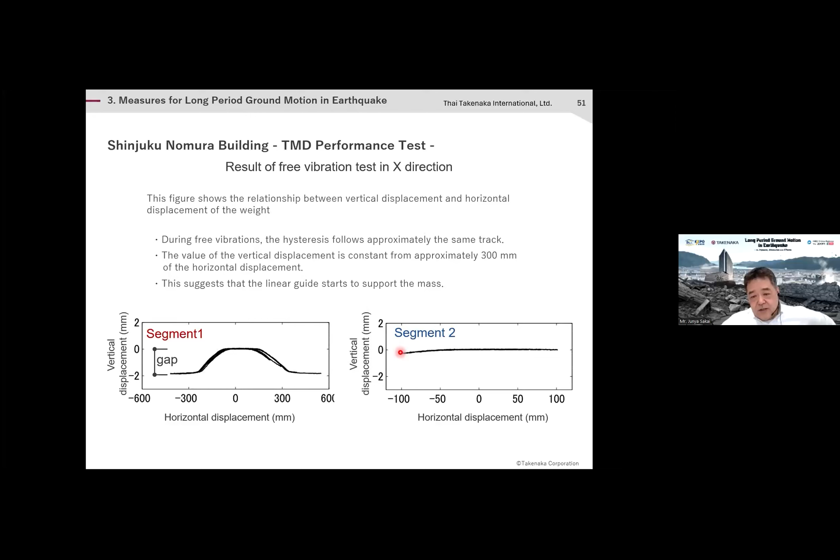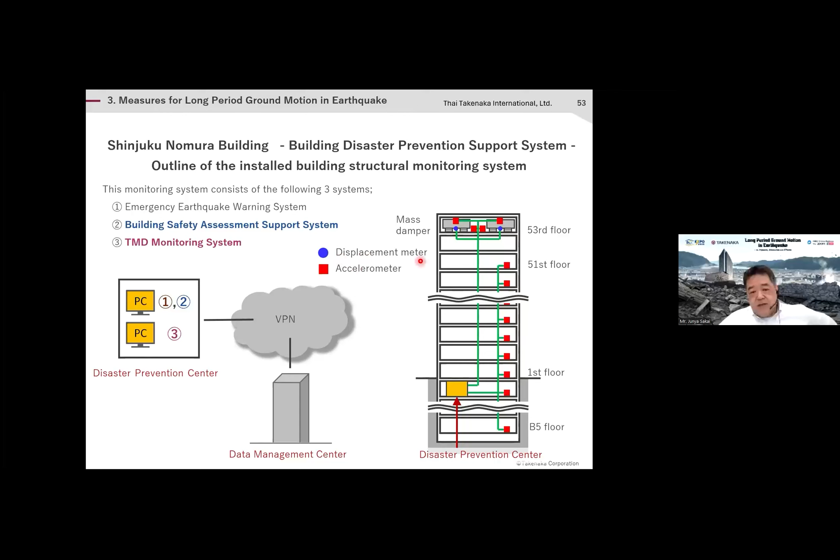This building has installed a building disaster prevention support system. The monitoring system consists of 3 systems: an emergency earthquake warning system, a building safety assessment support system, and a TMD monitoring system with displacement meters and accelerometers.

The emergency earthquake warning system predicts the long distance component of an earthquake, predicting the behavior of buildings and elevators immediately after an earthquake occurs.

The building safety assessment support system determines the safety of buildings immediately after an earthquake occurs, catching the distribution of maximum acceleration of buildings and the distribution of maximum sway angles of buildings immediately after an earthquake occurs.

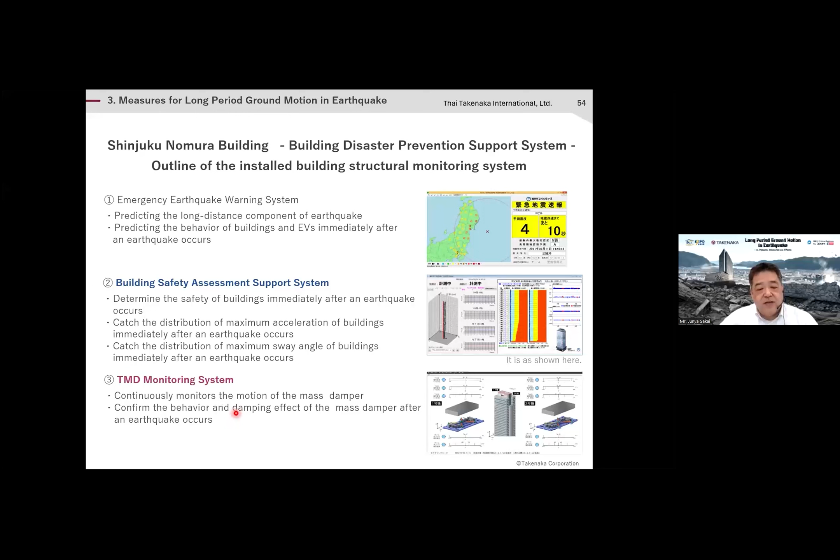The TMD monitoring system continuously monitors the motion of the mass damper and confirms the behavior and damping effect of the mass damper after an earthquake occurs.

This is the earthquake observation record data from the 22nd of November, 2016, after installation. The earthquake was in Fukushima; the epicenter was offshore of Fukushima Prefecture.

So we compare with the TMD. This is the observed record, and we assume the case without TMD by analysis, calculated from a single mass model with a primary mode. The behavior with TMD is greatly reduced by the mass damper system, as you can see in this graph.

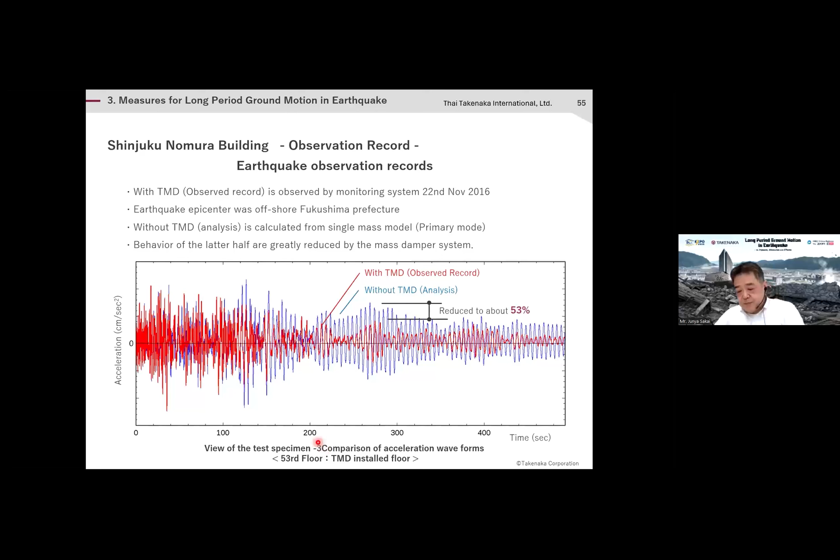Conclusions. Performance of the mass damper system (TMD) has been confirmed by full-size mock-up model tests. The mass damper system responds smoothly even for small building movements due to earthquake and wind load. Even in strong wind, the TMD worked effectively and did not suspend elevator operations. Even for amplitude exceeding the allowable displacement, stable behavior of the mass damper system was confirmed.

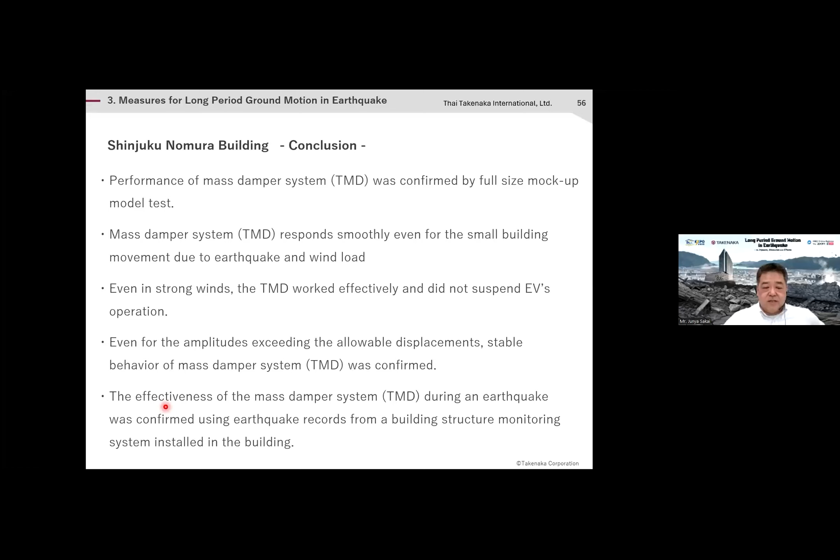The effectiveness of the mass damper system during an earthquake was confirmed using earthquake records from the building structure monitoring system installed in the buildings.